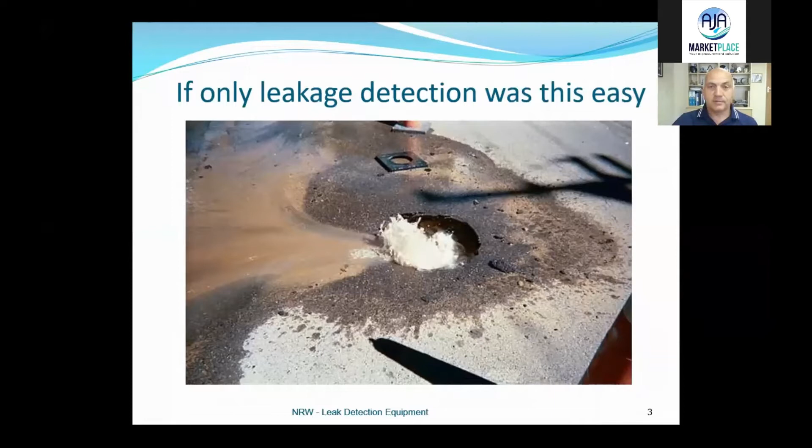But we have to go and find them. Now, how would we find them? We find them in many different techniques and methodologies, and many countries around the world do them differently. But all the time we need to go and find them. And we only have so many tools. We don't have everything.

We're not Superman, we're not Superwoman. We are just a normal person. And this is what people need to understand, that we are just normal people. We don't have X-ray vision. We cannot see through the ground. We cannot see what's going on beneath the ground. Technology today is beginning to get us towards this dream, but currently we are not there.

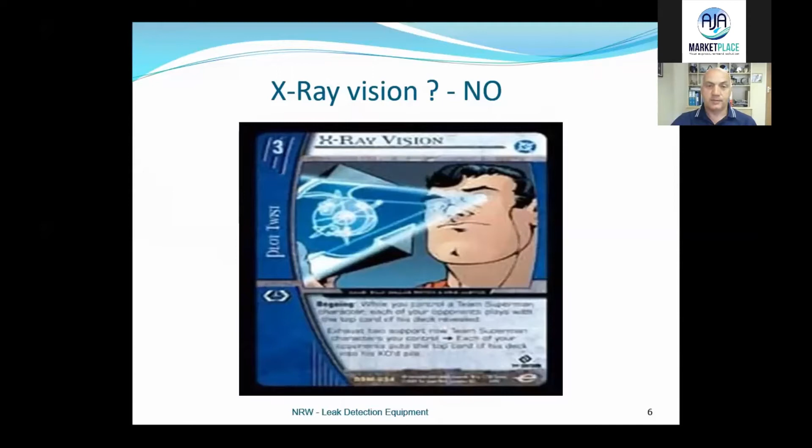So in effect, what are we? Or what are you, people that do leak detection? What are we? We're just ALFs. We call them ALF - it's just an average leak finder.

So when we look at how does he find leaks - well, his only chance is he has to go detect leak noises. He randomly goes, walks the streets to find a leak noise, to see if it's a leak or if it's a leak noise.

What does he need? Or what does she need? Because leak detection engineers now come in all sexes, all shapes, all colours - it doesn't matter. But what they need is equipment, training, and commitment. Now this needs to come from the water company itself, because the ability is there, the wanting to learn is there from these leakage engineers, but they can't train themselves. They need to have the correct methodology, the correct tools, and the correct training.

So this is basically to understand now what we are, and what we call an ALF is just an average leak finder. They're not special, they're not engineers, they don't need to go to university. What I always say is that with a leakage engineer, you can do it or you can't. Education doesn't come into it. You can be really low educated, but have a fantastic ability to find leaks. You can be super educated and not have one idea at all how to find leaks. So education doesn't come into this - this is ability, to be able to understand leak noise.

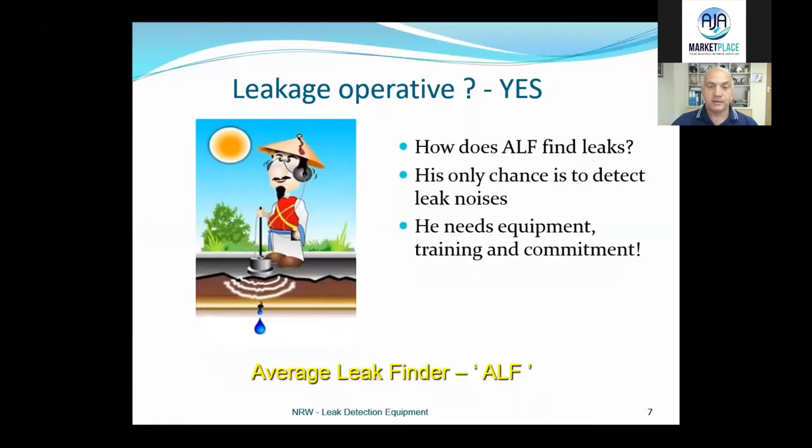So when we look at leak noise, the problem is there are many causes of leak noise in pipelines. People believe we just listen to the pipeline and hear a noise, that's a leak. No.

Consumption, pressure reducing valves, obstructions in the pipe, closed valves, changing pipe diameters where the velocity changes cause the noise, pumps, electrical interference, gas compressors, air conditioning units, refrigeration units, electric pump stations, lamppost lighting in the street - all these create a noise, and all these create the noise the same as what a leak noise creates. So we have to go out and understand, when listening for leakage, is it actually a leak noise, or is it one of these other elements that also create a noise?

And again, we can't train somebody to say, read a book and understand this. This comes with experience, and this comes with time. And it comes with error. You will make the mistake once and get caught out. Hopefully you don't make the mistake twice.

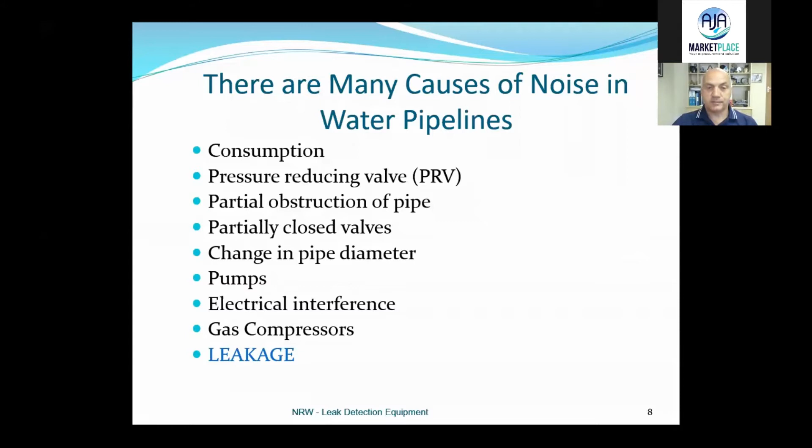So now we look at material types. Hope these material types are the things that the majority of the world has in their distribution system. We have steel pipes, iron pipes, copper pipes, asbestos cement, concrete pipes, lead pipes, PVC pipes, polyethylene pipes. So whichever you've got, they are what's generally in the distribution system.

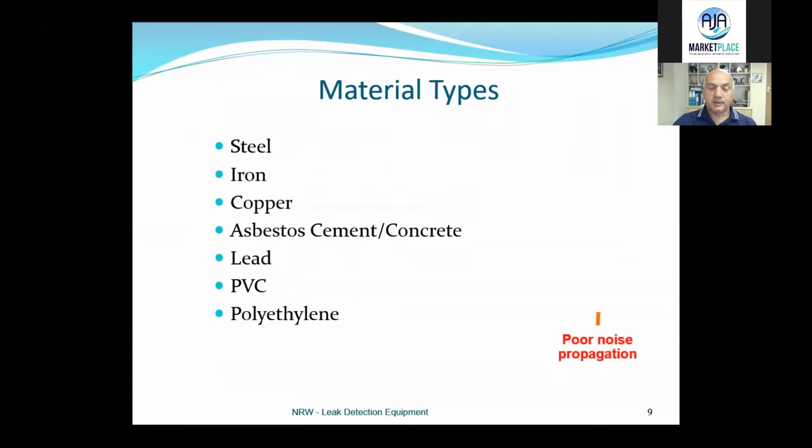And the problem is that the non-metallic pipes do not transfer leak noise very well, whereas the metallic pipes transfer leak noise very well indeed. And a way to explain this concept is that if I have a length of copper pipe, and it's 4 meters long, and somebody sits at one end of the pipe, and at the other end of the pipe I tap the pipe - the copper pipe - the person 4 meters away will hear that tapping on a length of copper or steel pipe.

If I do the same with a length of flexible plastic garden hose and tap, the person 4 meters away will not hear the tapping noise. The reason is the energy at the start, which is the tapping, is the same as a leak — it's energy. A leak noise is energy. On a steel or metallic pipe, that energy is transferred down the material because it's hard, which is very good. On a non-metallic pipe, that energy is absorbed into the pipe, which means the leak noise doesn't travel.

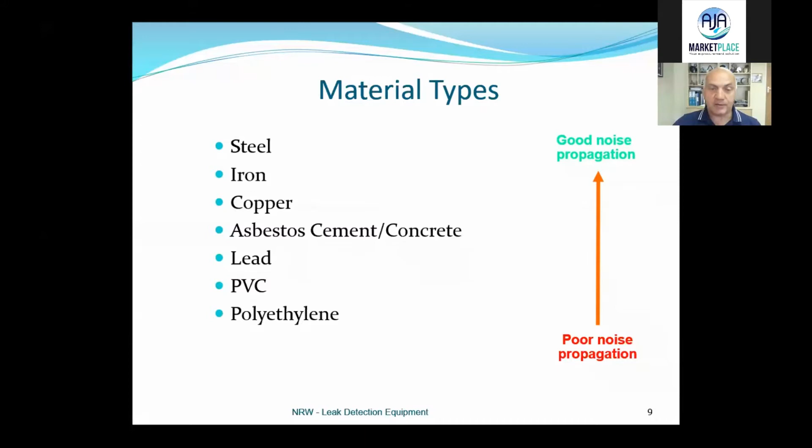Other things affect us. Pipe material, we just looked at — is it hard or soft? Pipe diameter also affects it, because on a large pipe, the energy has the cross-sectional area of the pipe to be absorbed into. On a small diameter pipe, it isn't absorbed into the surface of the pipe because it's very small, so the sound can travel the distance. On a large diameter pipe, the energy is absorbed around the pipe, so it doesn't travel so far. This is irrelevant of material — diameters of pipes are different. This is relevant when we're listening on mains fittings for leak noise, not when listening above the surface.

All these apply when we're listening on fittings to hear if there's a leak noise present. Pressure is different too — if we have 1 meter of pressure or 60 meters of pressure, the energy from the leak increases with higher pressure, meaning it can be transferred further down the pipe. So this is common sense. But if you've got 3 meters of pressure, as in many places in Asia, and you're listening on a 500 millimeter pipe, 300 meters away from the next fitting, you are not going to hear the leak, even if it's there.

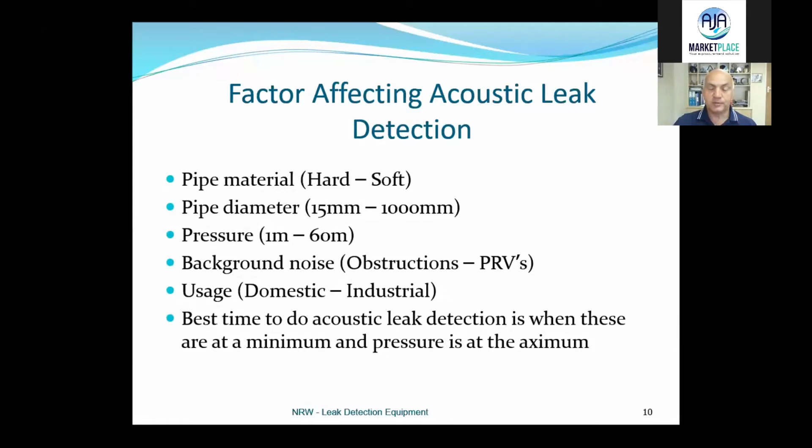One more thing to think about: we need to ensure we do leak detection when there is water in the main. You may not think this is common sense, but I have seen cases where people with intermittent supplies conduct leak detection when there is no water present in the pipes. It's ridiculous, but it's happened several times, because the people doing leak detection aren't aware of when distribution is putting water into the system. Again, something to look for.

So when we look at leak noise, what is leak noise? Leak noise is constant. What do we mean by this? That means no matter what, every time you go back to that pipe, the leak noise will be there. If it's background noise, the noise will come and go depending on usage or whether electrical interference is on or off. That is the difference between leak noise. Leak noise is always there.

Leak noise travels through the pipe wall and in the water. It travels in both directions, and the further from the leak, the weaker the noise. If the pipe wall is soft, it travels a smaller distance in the pipe wall, but it will still travel in the water the same distance. Regardless of whether it's metallic mains or non-metallic mains, when it's leaking and traveling through the water, that is a different scenario to when we do leak detection, listening to the pipe wall, a valve, a hydrant, a stop cock, a service valve, or a house connection.

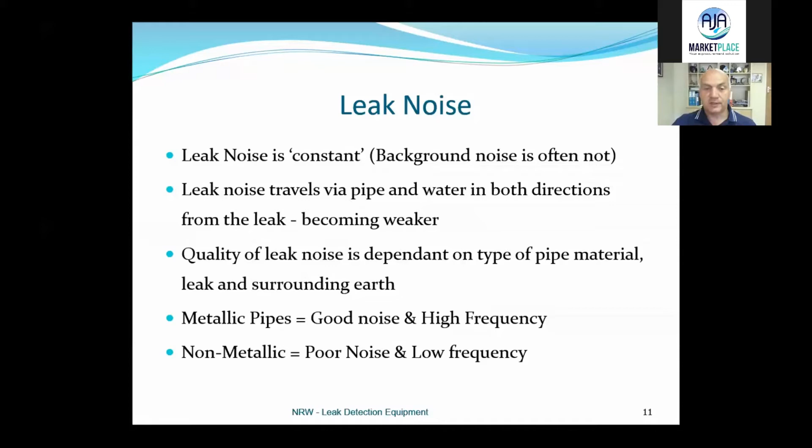So just to go over this again, what is good quality? Nice high water pressure, good pressure, 20, 30, 40 meters pressure, very good for leak detection. A good hard backfill, but stony, which lets the water leave the pipe. A small hole in high pressure will cause a very high noise, a high amount of energy to leave the pipe, and that's good for leakage. A clean pipe means the ability of water to transmit it, and it doesn't cause obstructions that can cause background noise. Metallic pipe, small diameter - all of them are good for leak detection.

Now look at what is poor quality for leak detection. Low water pressure, soft backfill, poor backfill material. Not just little holes in the mains, but splits in the mains, blocked up pipes, non-metallic pipes, large diameter.

Now, the problem is that where we see poor quality - low pressure - Asia and a lot of the Asia regions have that. Low pressure, non-metallic pipes. You have concrete pipes, you have lots of plastic pipes. Large diameter pipes, meaning above 300 millimeters. So your ability in Asia to hear leaks and do leak detection is even worse.

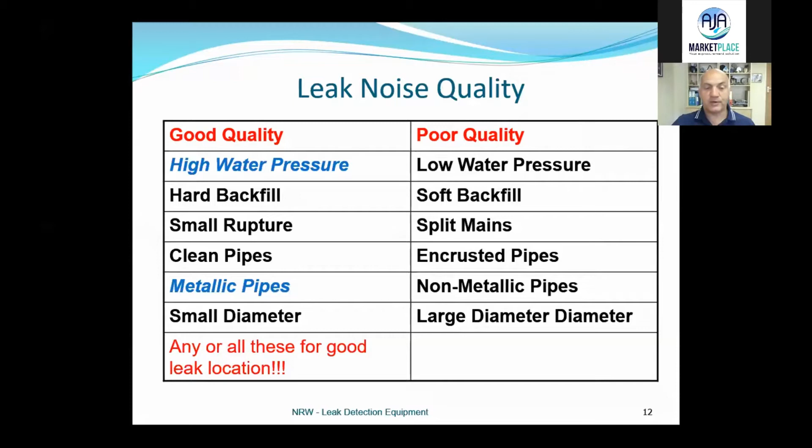In England, in the UK, in the USA, we have smallish pipes, good pressure, good backfill. We had a lot of metallic pipes years ago. Leak detection was so easy. So when you see people from the UK as expats come out and say leak detection is easy - it is easy in the UK because we have the perfect scenarios. We did have, now we have lots of plastic pipes. We did have the perfect scenarios for easy leak detection.

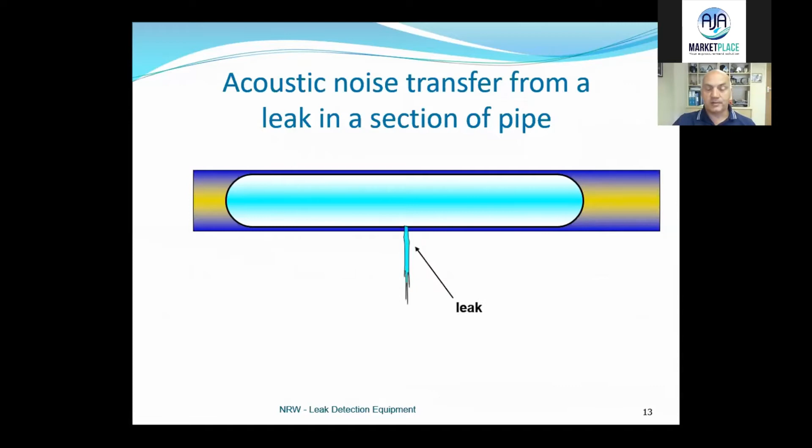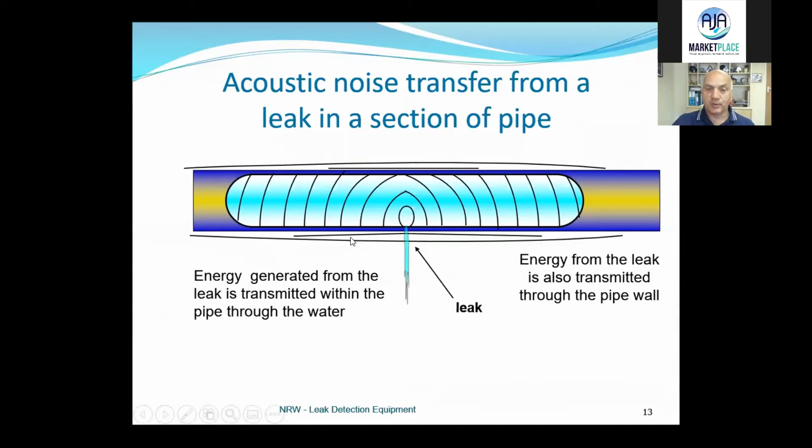So just to put that into practice, we have a leak on a pipe, with pressure in the main and the leak on the pipe. Energy from that leak is transmitted through the water, and it goes through the water for a long distance, further than on the pipe wall. But at the same time, energy goes through the pipe wall as well. So it's in the pipe and on the pipe wall.

So when we look at pressure in a pipe, a small leak can happen because in a pressurized pipe, a small leak doesn't cause any issues to you on a pressure drop. So the small leak doesn't matter. Small leaks can happen everywhere and run for very long periods of time, and we won't even know they're there unless we monitor the system. This is monitoring through DMAs or metering or some other method of finding those leaks. So small leaks can run for very long periods of time.

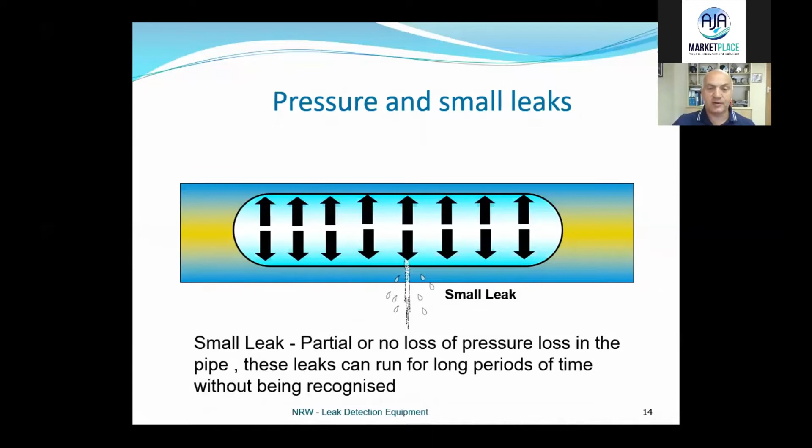Whereas a catastrophic burst, a big leak, which people think are problems with leak detection, are not. What happens is the pipe fails, it bursts, it causes a catastrophic failure, pressure is lost immediately in the pipe, people are aware there's a leak, water comes to the surface, or water will gush somewhere, and you'll find that leak sometimes within maximum 1 or 2 days. So that's not a problem.

So where people think the big leaks are problems to leakage engineers, they're not, they find us. So this is the difference. We have the problem with the little leaks.

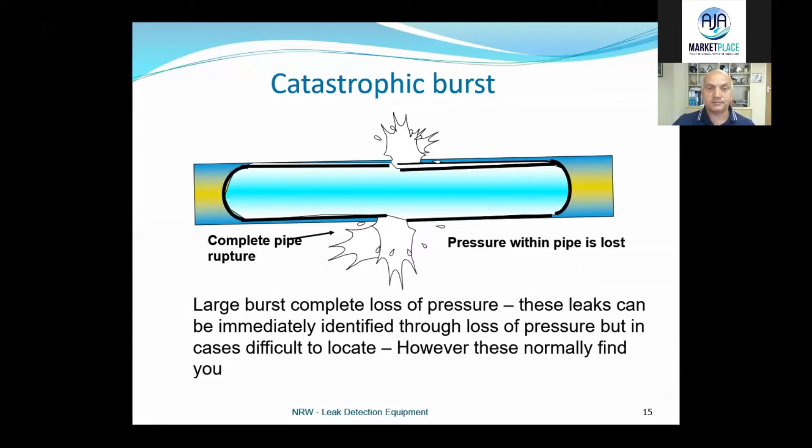So now we're going to look at how we do a leak detection survey. What do we do? We've got several methods we can use. We're going to look at the process called LLP: localize, locate, pinpoint. We have optimum and we have basic. We'll quickly go through each one so you can understand the principles.

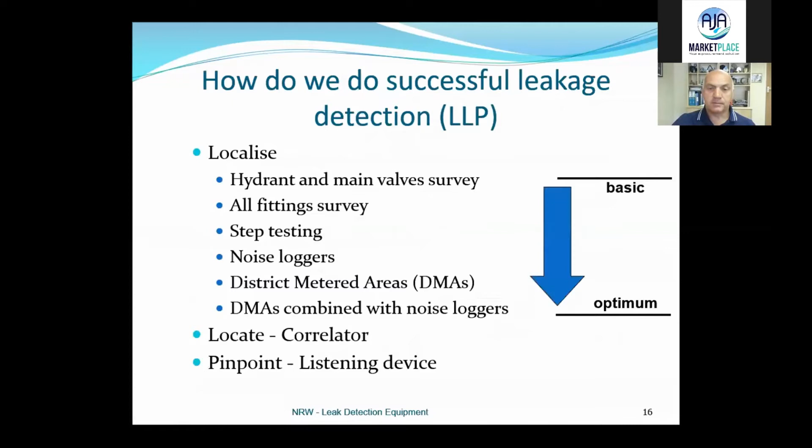We're going to start with localize. We have 2 techniques, all fitting surveys. We listen on every fitting, every tap, every valve, every hydrant, every house connection, every outside tap, everything we can see, we listen on. It's time-consuming, it takes longer, but it works on all mains materials. Although the lower the pressure, you need to be listening closer to the leaks or closer to the fittings so you have a chance of hearing the leak.

Mains fittings only - you only listen on a sluice valve or a fire hydrant. It's quicker, you'll miss all the small leaks, you may get the burst mains depending on the pressure and the ability for the leak noise to travel to that fitting, and it's only good for metallic mains.

So now looking at that, mains fittings only was something I started with in 1980, 1981, when I started doing leak detection with Anglian Water, because we had metallic pipes, 100mm 4-inch pipes in the ground as average, very good pressures, 30 to 40 meters pressure, and I could hear a burst main 300 meters away. Today, not a chance. We go back to all fitting survey.

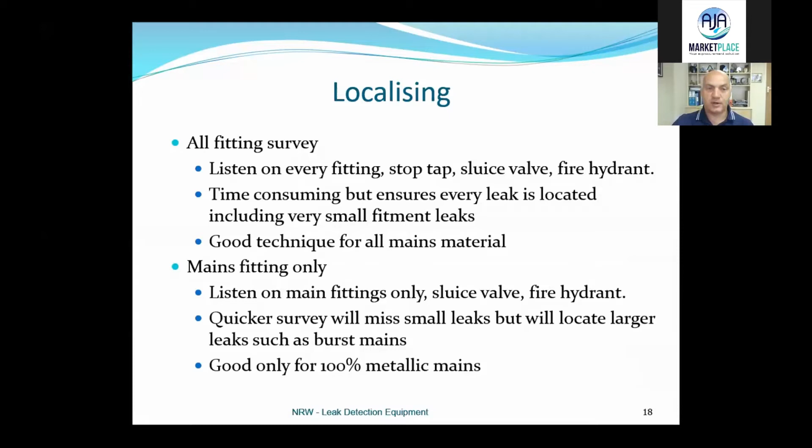We also have noise loggers. This is localized as well, noise loggers, and we have district metered areas. We can have district metered areas with noise loggers. We can have district metered areas with sub DMAs within there. There's different scenarios - so the basic version is just listening, then noise loggers in a lift and shift method or moving, or district metered areas with noise loggers involved as well.

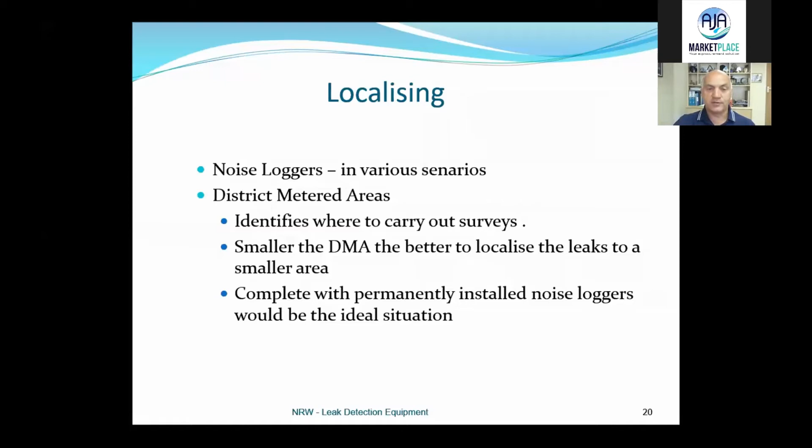A noise logger is what it looks like, just being put onto a fitting. It doesn't just listen to leak noise - it listens to all noises. So it's not just noise, it's a noise logger, it listens for constant noise. This is different - people think, oh, it's going to find the leak. No, it will listen to every noise. Long battery life, 5 years, very simple to install.

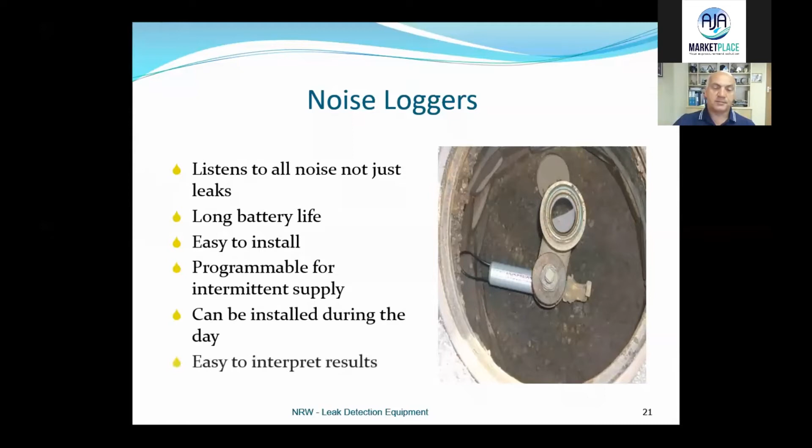You can program it to wake up at different times. So if you're on intermittent supply, you can work that out. It can be installed during the day, and you can tell it to wake up between 2 o'clock and 4 o'clock to see what's going on. See the size of it, quite small. All the manufacturers now make these - they're not specific to any one manufacturer.

Ideally on metallic pipes, you want to be no more than 250 meters apart. And because leak noise will travel in both directions, this will listen 125 meters either way. So if they're all 250 meters apart, they will cover 125 meters either way minimal, and they will also do an overlap. When we get to plastic pipes, non-metallic, they need to be set much closer - don't go any more than 80 meters apart on a non-metallic main, which means the noise logger only has to hear the leak 40 meters in either direction. And that's even if the leak noise will travel. So depending on your pressure, you need to understand how far you're going to put them apart.

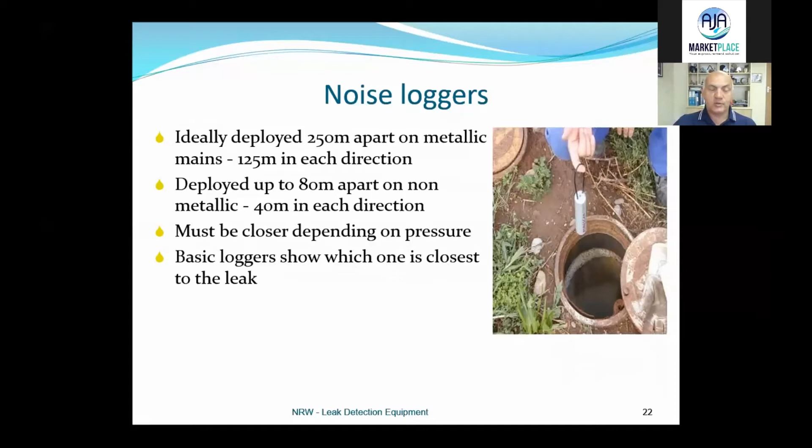And when you look at the basic loggers, when you download them, the logger closest to the leak will show a bigger peak. That's all you need to understand. You've also got advanced correlating noise loggers, which is a different thing altogether.

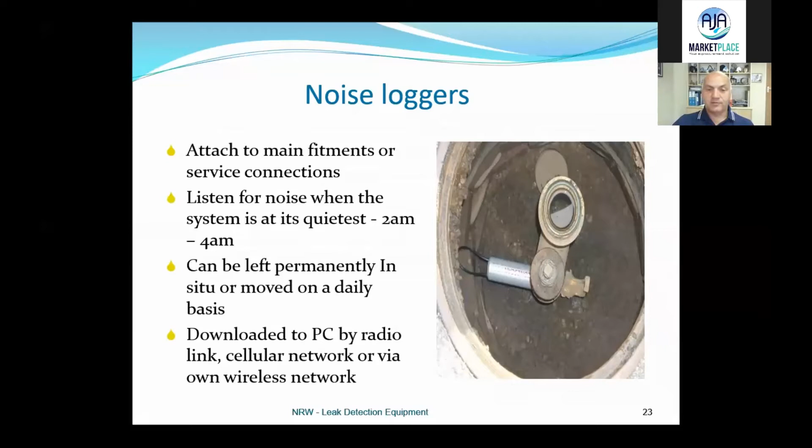So again, you attach them to your fittings, main service connections. Tell it to wake up when your system is quietest. You can leave them in situ permanently, or you can pick them and move them on a daily basis. They're available to be downloaded manually via a radio link. You can connect them now to a cellular network through your wireless or telephone network, or you can have your own wireless network as some countries do, and it can come in over that network as well. They all come in different ideas.

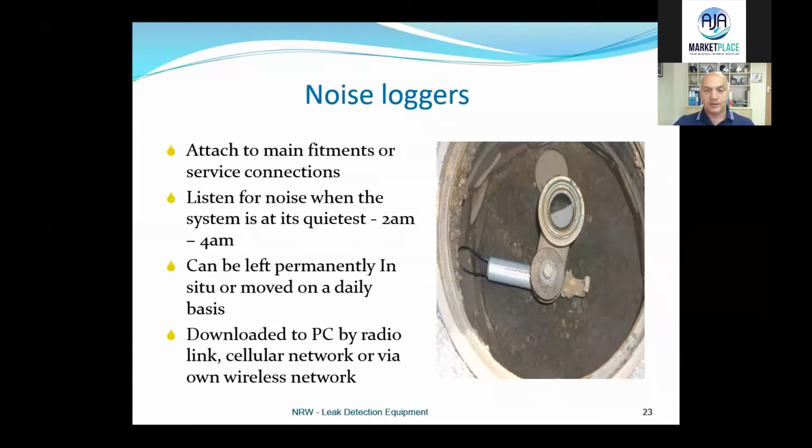Basic version, just by drive-by or picking it up and downloading it manually. And what it does, it gives you a cluster. If you're just doing it in the basic version, you get it up, you plot it, and it just gives you clusters. It tells you where the cluster of noise is, and that is where you go to look.

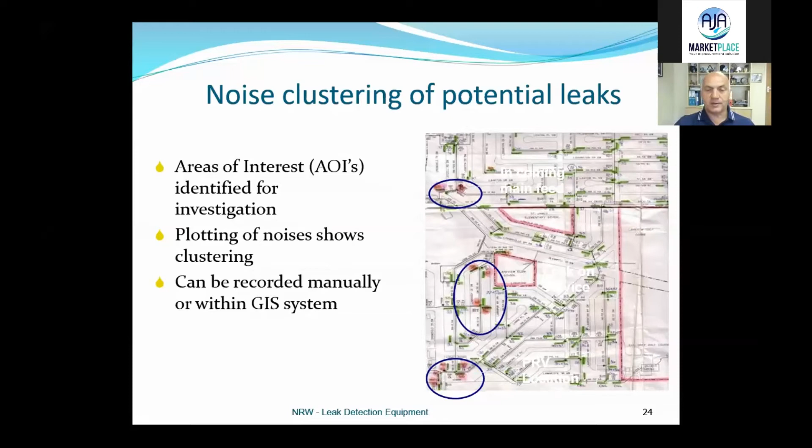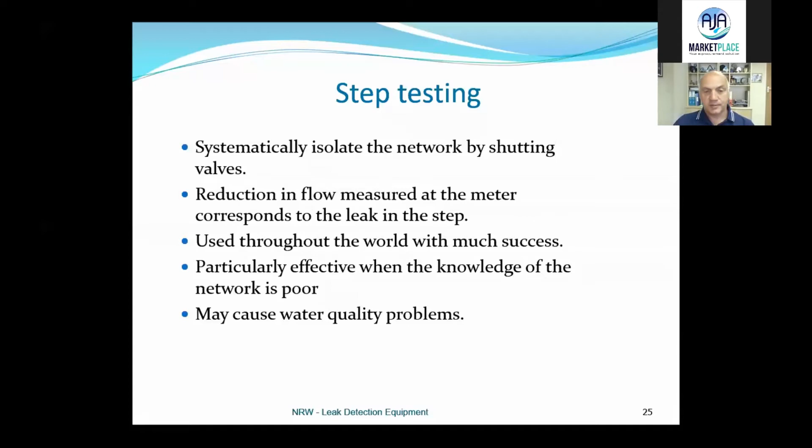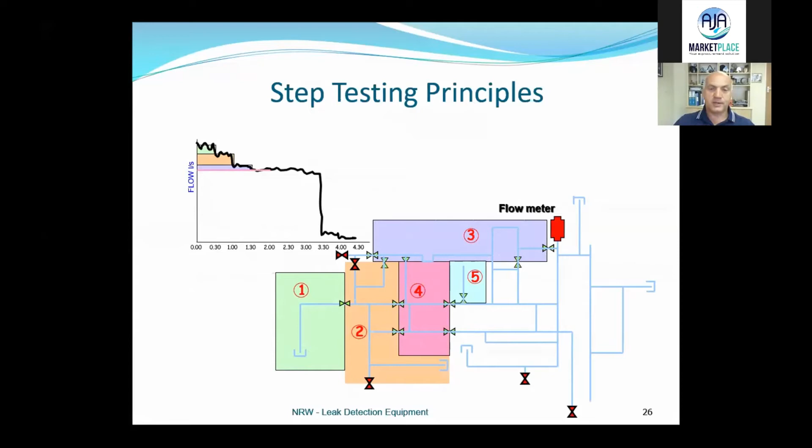But again, when you do step test training, you will learn and understand this. So here we are, step testing principles, flow meter. We enclose the area because we're now within a DMA. We go out and set the flow meter up, put our meter on there, and read in what is happening going into the area. And we start to turn off areas of the network bit by bit, and we monitor the flow. And if you can see on the graph, as we turn each one down, we can see how much water is being turned off or stopped in each step.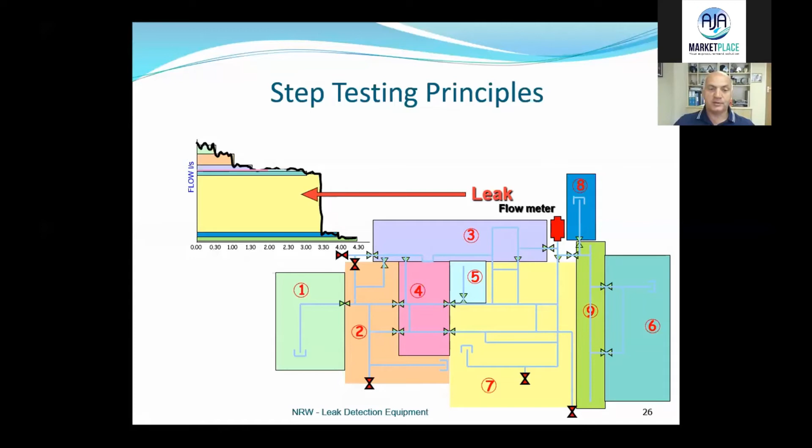Now we can see, looking at that, in step number 7 it's a bigger area than others, which is fair, but it had a significant drop compared to all the other areas. So now we only need to look at the region in step number 7. And if we wanted to, if that was a large area, we could do another step test within that step number 7, and it will tell us which street the leak is in. So you can use this if you've got a big leak with no leak noise and you don't know where to start looking.

Quick look at locate. Locate is a correlator. A correlator does not pinpoint the leak - a correlator gives you an indication of where the leak is. And as with noise loggers before, you do have such things as correlating noise loggers as well, which have much the same usage as a correlator, but will be left in situ for longer periods.

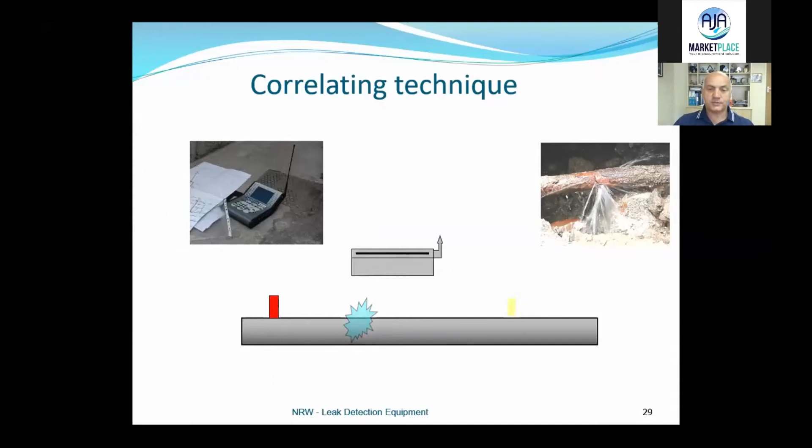So again, our pipe, we find we have a leak. We go out there with a correlator and we deploy our 2 boxes. It doesn't matter whether it's red and blue, red and yellow, A and B, 1 and 2 - there's always 2 boxes. You measure the distance between the boxes going along the length of the main and the fitting, between the fittings, so you need to understand the length of pipework. And you input that data into the correlator. At the same time, you understand the pipe diameter and the pipe material.

So what we do, we enter the diameter into the correlator and we enter the material into the correlator. The correlator has a preset of tables, and in those tables it tells us the velocity of sound down that pipe wall based upon the diameter and the material. And we know the distance, so we put it in, and the correlator does a time delay between the red box and the leak noise, and the yellow box and the leak noise, and it does a simple calculation and tells you where the leak is.

So it's just L equals distance minus velocity times time delay divided by 2. This is what the correlator does. We must know the distance, the diameter, and the material. If we guess any of them wrong, the leak position is wrong. If the pipe material is wrong, the velocity is wrong, the leak position is wrong. If the diameter of the pipe is wrong, the velocity is wrong, the leak position is wrong.

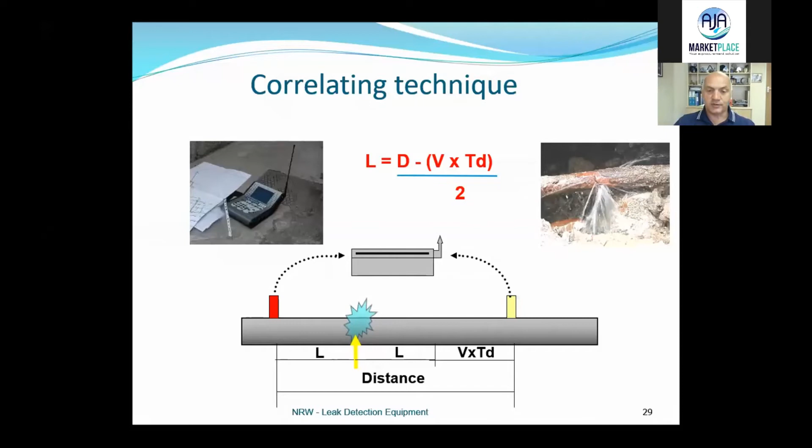So again, if we look at a screen from a correlator, you can see on there we put the distance in, 259 meters. We put the pipe material in, and the diameter, which gives us a velocity down the pipe of 1,110 meters per second, or 1.11 meters per millisecond. We don't have to calculate that, we just need to put the material in and it tells us that. Based on that, it's calculated the time delay from the blue of 58.93 milliseconds.

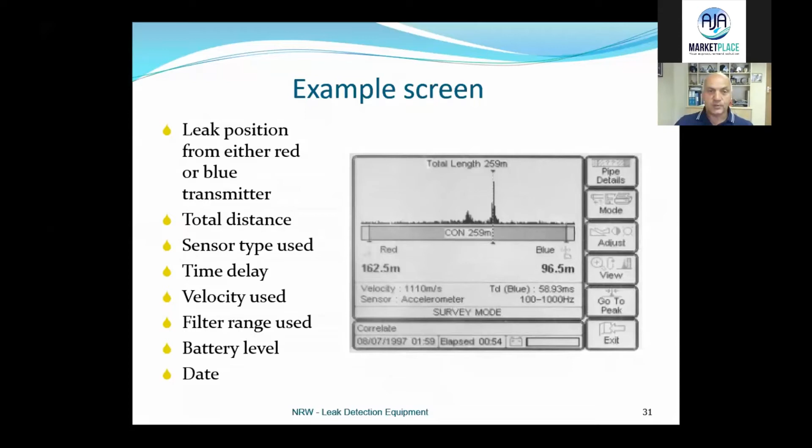We don't need to worry about all this. We just need to worry about getting the distance, the pipe material, and the diameter correct. And it tells us, in this instance, 162.5 meters from the red, it throws a peak up, and the peak indicates that position - if all your data entered is perfect, that is your leak position. If it's not perfect, you can be within 5%, 2%, 10% of that position depending on how accurate your inputted data is. So this is why it's only a locator, not a pinpointer.

You can go to mid-range level. Basically, you have two boxes, A and B, 1 and 2, red and blue, red and yellow. It doesn't matter where you buy them from, as long as they're all the same basic two-box systems. They're all much the same as each other, they all work the same, they all use the same theory, they all use the same formulas. Nothing changes, and there's probably not one now that is better than the other.

I always suggest that whatever one you purchase, base it upon the ability to have support in your country, your town, or your city. Don't buy one that has no support anywhere, where it's only phone calls or people having to travel or take flights to come see you to answer a question.

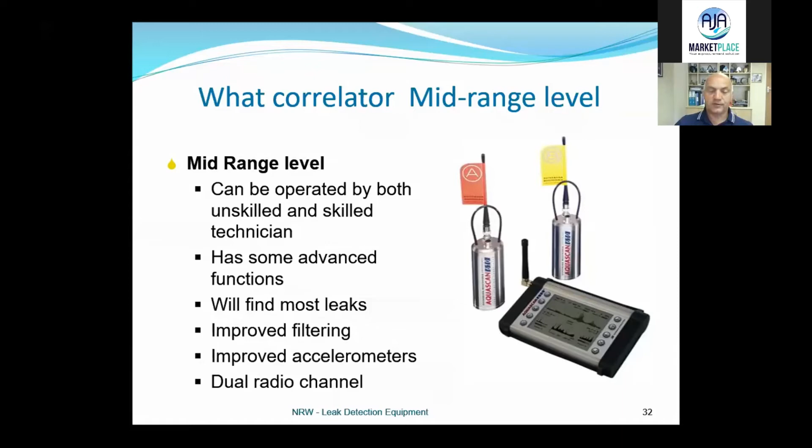Let's look at pinpointing. What is pinpointing? This is when we're going to actually tell you where to dig the hole, the exact position. What happens is, you've got your pipe, the pressure's inside the pipe, you suddenly have a leak. That leak noise goes through the pipe wall, through the water, and also transmits to the surface. In transmitting to the surface, we walk over the line of pipe and we listen for that leak noise.

Where that leak noise, for ease, is loudest, is where you are possibly over the top of the leak. As we said before, the material of the backfill will affect the ability for the leak noise to come to the surface. The pressure in the pipe will also affect it, because if it's very low pressure, the leak noise will not travel to the surface since it's not leaking out of the pipe very much - therefore it's a weak noise and won't travel.

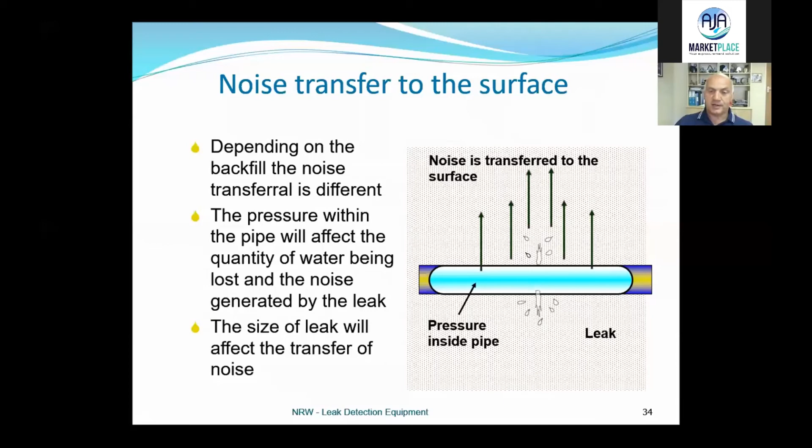But in reality, the size of the leak will make an effect, but the pipe material and the diameter won't affect the leak noise coming to the surface. It's the leak type, the leak size, the pressure, and the backfill. Diameter and material are not a factor in pinpointing a leak.

We do that when it's best done at night, when it's quietest, when there's no background noise, when you have no traffic up and down the streets. That is when you do your best pinpointing. Pinpointing is when you actually pinpoint the position to do the leak position, to do the excavation. So we localized it in a region by step tests and brought it to a region. We've located an area of the leak with a correlator or with something, and we have now pinpointed the position of the leak.

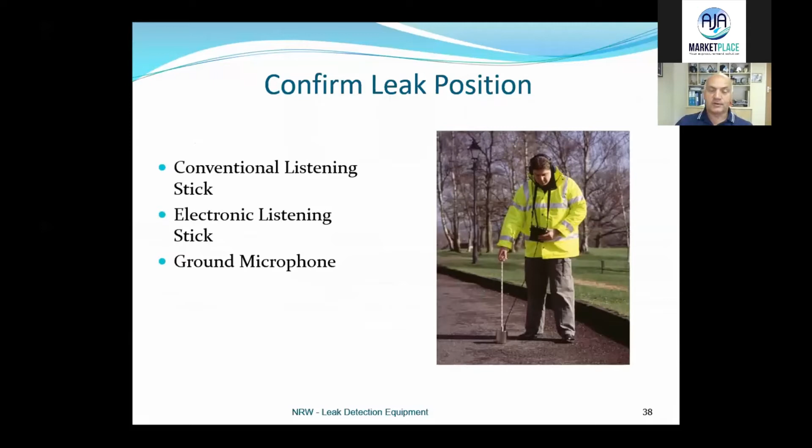So with pinpointing, we have various techniques. We have the conventional listening stick, a metal listening stick, an electronic listening stick, or the ground microphone. The ground microphone or the electronic listening stick is what you should always use. Do not use the metallic or the wooden basic listening stick. You will miss more leaks than you find.

The reason being that the noise is amplified and you'll get a greater sound, and the background noise can be somewhat hidden. But always use the electronic device, and if possible, use an electronic device that has an indicator on it for sound. So if you can't hear the difference, the indicator on the display will tell you whether the loud's higher or lower at that point.

So now we're looking at what should I buy? Do you need noise loggers? Do you need correlators, or just need listening sticks? If you're starting at the beginning, you need just a basic listening device, an electronic listening device.

But are you metallic or plastic? What are your mains? Do you live in a city, or is all your area urban or villages? Is it busy in your city or busy in your town? Do I have DMAs or no DMAs? Have I got lots and lots of leaks, or do I have just a few leaks popping out every now and again?

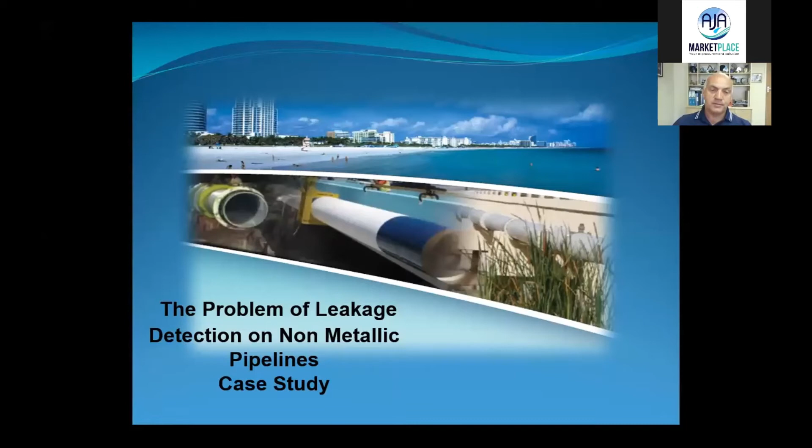So first of all, let's look at the human ear. When you were born, your hearing was perfect. When you're a little baby, your hearing is perfect. As you get older, your hearing starts to deteriorate. Normally at the age of 8, it starts to deteriorate quicker because you're starting to listen to louder noises.

Now, what effect is this having? If you look at your children on their Xboxes or their electronic devices, or listening to music through their headphones which is quite loud, they are damaging their hearing. Their hearing will never ever come back to what it was. So what happens is, depending on whether you listen to loud music or what you listen to, your hearing decreases or gets worse with age, and gets worse quicker or slower depending on what you've done in your younger days with music, concerts, or playing games.

So what happens is, as a young adult, your hearing has dropped from the high of 20,000 hertz. When you're a young adult, you drop to 16,000, and at 30 years of age, you're down to 12,000 hertz. This is your ability to listen for a leak. And your low range of 20 hertz is probably now higher, and you can only hear leaks or noises that are probably at 100 hertz.

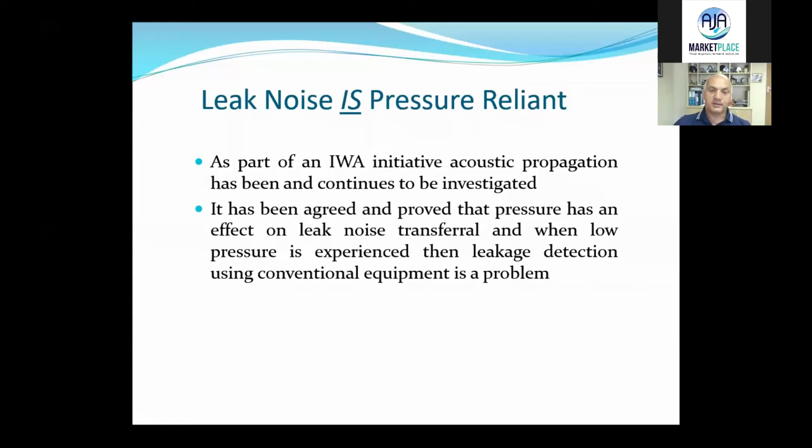So what happens is, a common technique we use anywhere in the world is we go around the mains, fittings or house connections, listening for leak noise. But the age of the user or the ability of the user, we don't monitor. We just recruit somebody to go do leak detection. And generally the people recruited for leak detection have, in the old days, either been digging a hole, or we just find somebody from an agency and put them into leak detection jobs. And we do not know if they have the ability to be able to hear the leaks.

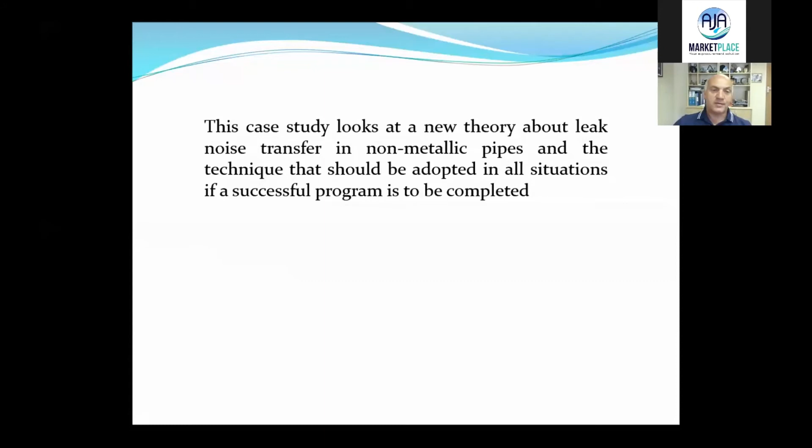So that's one of the things we found on some projects. And this case study looks at the leak noise transfer in non-metallic pipes. What I found on a project I completed - I did some work in Canada, some work in the US, the Caribbean islands, and Asia - I found the same thing everywhere, the same results everywhere.

When we used an electronic microphone, the bottom line being pressure in the pipe in meters, and the line on the left is the distance between the fitting noise we heard from the stop tap. So we know how far away we heard that leak noise on a piece of pipe. We're listening on house connections, and we're listening to see how far we could hear a leak away by listening on a house connection or a valve.

So we could see using an electronic device that if it was at 5 meters pressure, we could hear leaks 5 meters away. But when it was at 5 meters pressure, we didn't hear leaks 10 or 15 meters away. When we got to 10 meters pressure, we could hear leaks up to 10 meters away, but we couldn't hear leaks that were 15 or 20 meters away. And again, when we got to 15 meters pressure, we could hear leaks anything less than 15 meters away, and we could hear leaks up to about 18 meters away because the pressure was getting up.

The same as on 20 meters, the maximum we heard was 24 meters away. But what you can see is that no matter what pressure, when we get to 45 meters pressure, which was in the Americas, we only ever heard a leak that was probably the maximum 28 meters away. So we know now that leak noise does not travel more than 30 to 40 meters on plastic.

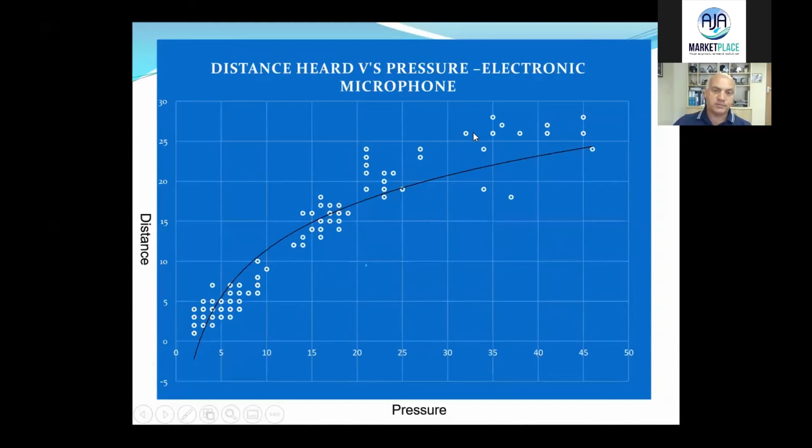And what we're finding is, regardless of pressure, that if you're using a manual listening stick, when you start getting on average much more than 6 or 8 meters away, you will not hear the leak. So if you're listening on a house connection with 10 meters pressure, if the leak is much more than 7 or 8 meters away, you won't hear it. So we suddenly found out that manual sticks do not work, because we're relying on the ability of the engineer to do it, and some can hear, some can't.

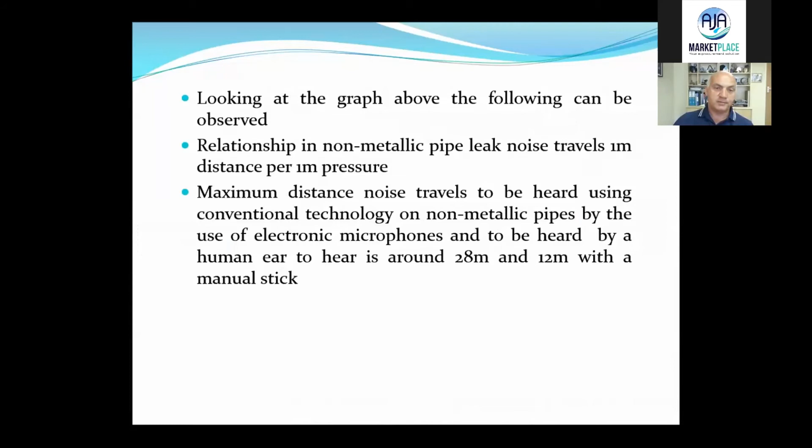So when we look at the relationship, you can see that the distance we could hear with the electronic ground microphone was about 28 meters, whereas only 12 meters with a manual listening stick. So you can see now that on a non-metallic pipe, don't use a manual listening stick. You can see the relationship was proportional until around 18 meters. But the story is, you can listen to more leaks with an electronic ground microphone stick than you can with a manual stick.

And what we found was a rule of thumb: for each meter of pressure, the leak noise will travel 1 meter in distance. So this is critical - for each meter of pressure, the leak noise will travel 1 meter in distance.

So in this scenario, we have 3 fittings where you see the arrows away. Here we had about 4 meters pressure, so we knew we could listen on each of the arrows, and we knew we could hear a leak on the mains pipe as well, because they were all within 4 meters of each other. This one here, the same area, about 4 meters of pressure. We knew here we could listen on the house connections with an electronic device, and if there was a leak on the service pipe or the main pipe, we would hear it because we were always within 4 meters of a connection.

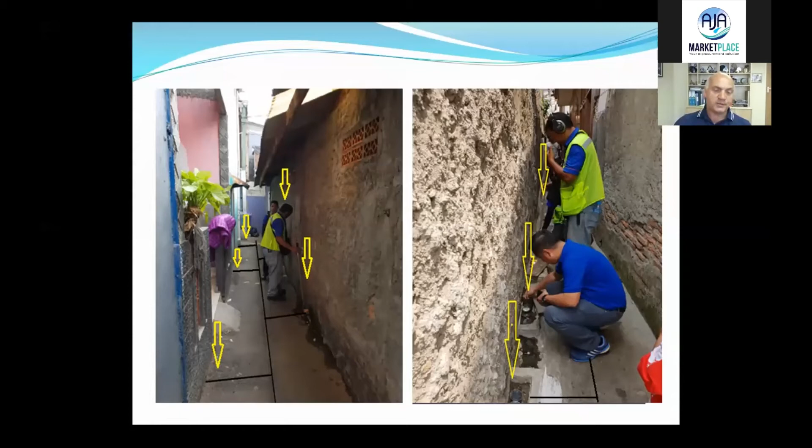In this area here, we had about 8 meters pressure. But here we knew that if we just listen on a house connection, the distance of pipe between each house connection was greater than 8 meters, so we knew we would miss a leak. So this is what we learned - we have to look at the pressure in the pipe. If the pressure in the pipe is 4 meters, leak noise will travel 4 meters from that fitting. So if you're listening on a house connection at 4 meters pressure, the furthest leak you'll hear will be 4 meters away. If there's a leak 5 meters away, you will not hear it.

So when you're doing leak noise detection at night and you can't get a house connection, you cannot listen on mains fittings only - you have to listen on the surface. Listening on the surface, you listen every meter with a ground microphone. This is what you have to do for successful leak detection. So the best practice is a ground microphone every 1 meter over the main and over the service connections. That is your best practice in all scenarios. It's slow, but the transmission of the leak noise to the surface isn't affected, as we mentioned earlier.

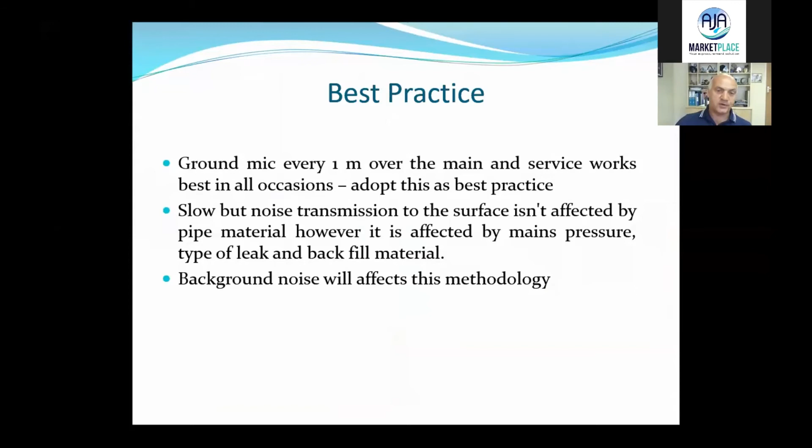As we said, do not rely on manual sticks for deaf people. Do not rely on manual sticks for any people - use electronic ground microphones. When you employ your staff, ensure they're not deaf. Complete a hearing test for all your staff. Work when your pressure is highest and your background noise is lowest. These are all simple things. But with that, I hope you've learned some things, I hope you've got some ideas, and I hope you've understood a lot of what I spoke about. So thank you, thank you so much.

Stuart has been very direct about how difficult leak detection in Asia could be because of our pipe materials, water pressure, and other factors and scenarios making leak detection really challenging. I agree with Stuart that we are not superheroes to easily scan the pipes and find right away where the leak is. Not all the noise we hear during leak detection means it is already a leak noise, so leak detection is indeed tricky. That's why having knowledge of leak detection, of the devices available, and also having experience is really needed, because leak detection is a very important first step towards stopping leakage to achieve long-term and sustainable reductions in NRW.